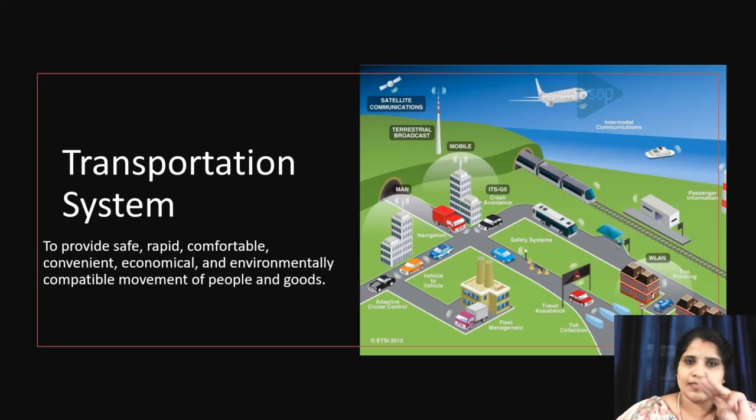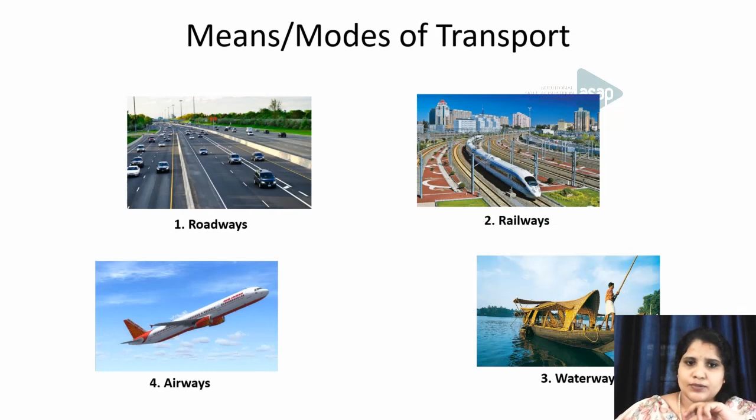Depending on the means or modes, transport can be classified into four: roadways, railways, airways, and waterways. Today we will be seeing roadways in detail. Focusing on road transportation, there are two elements: one is the traffic engineering part, and another is the pavement engineering part.

Under traffic engineering, you might have studied in your modules 1 and 2 the geometric design of highways and the various traffic factors influencing it, including design elements like vertical alignment, horizontal alignment, and sight distance consideration. Along with that, we'll have to study intersection design also, and today's class will concentrate on the intersection design part.

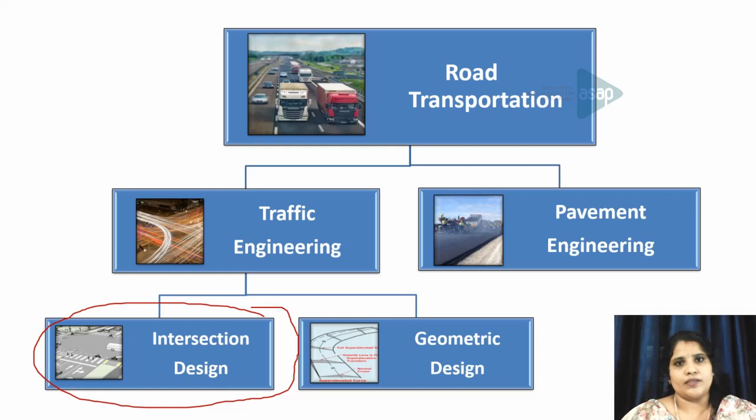In pavement engineering, we will see the different types of pavement and the different materials that can be used for construction of pavement, the standard test procedures used to ascertain the quality of materials, and also the different design methods, all covered under pavement engineering.

Let's consider a traffic corridor. Depending upon the traffic flow characteristics, the traffic corridor can essentially be split into a mid-block section, a transition zone, and an intersection. The flow characteristics are different for each of these zones. If we consider the mid-block section, almost all vehicles are in a free-moving condition, or sometimes in a car-following situation.

Whereas if it is nearing an intersection area, depending upon the control provided there, it may be showing a red signal or a green signal. Accordingly, it may take a decision whether to move or to stop. If it is stopping, it has to stop and wait in a queue.

So what happens in the transition zone? From mid-block to the intersection, there is some kind of transition happening. For example, a vehicle from the mid-block, if he wants to turn left, he may be shifting his position, or if he wants to turn right, he may be shifting his position to the right. And then he needs to decide on his speed, whether to reduce it or safely move with the same speed.

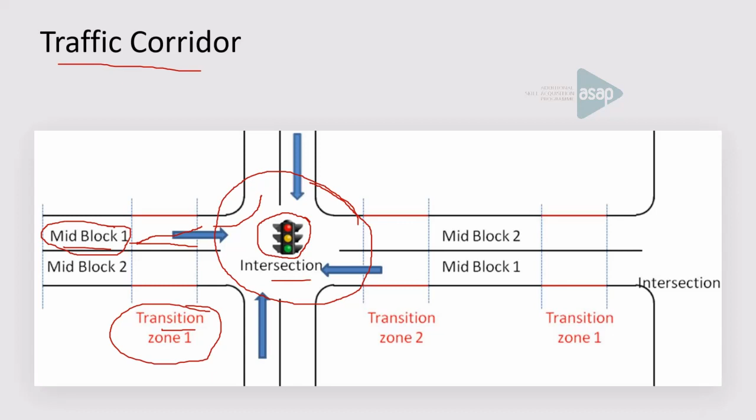So the transition zone is a zone of transition from mid-block to the intersection area. Let's see in detail the intersection, the different types of intersections, and the design parameters to be considered, and also we will see the signal design, the Webster method of signal design.

Intersections may be classified into two broad groups. One is at-grade intersection, where all the roads are meeting at the same level. Different examples are unchannelized intersection, channelized intersection, and rotary intersection. All are examples of at-grade intersection where the roads meet at the same level.

Whereas in the case of grade separated intersection, the roads will be meeting at two different levels. The intersecting roads are separated by a difference in level, thus eliminating the crossing maneuver.

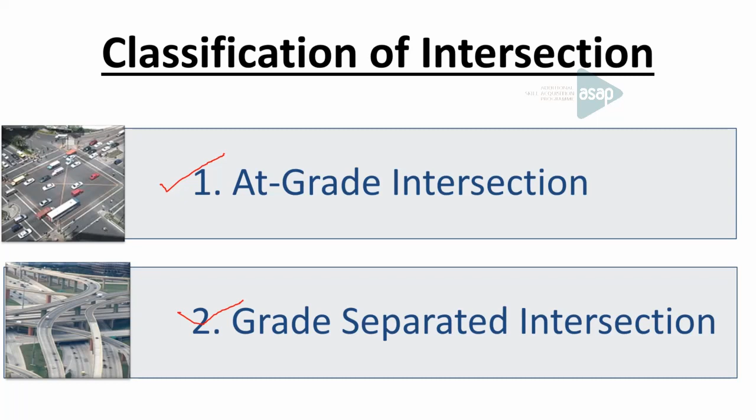The at-grade intersection can further be classified into a three approach intersection, where there are three roads or legs meeting at a point. It resembles the alphabet T, so it's called a T intersection, meeting at right angle. Whereas if one of the approaches meets at an angle other than right angle, it becomes a skewed T. It can also form a Y intersection depending upon how the three roads are meeting.

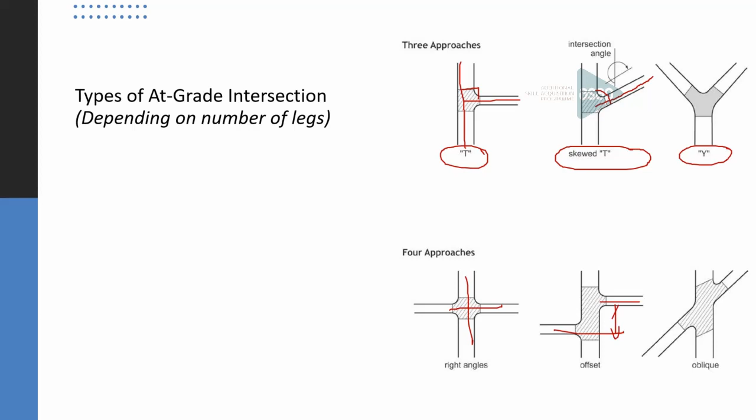Then there can be four approaches meeting at right angles, or meeting at an offset, or there can be an oblique intersection where all four roads meet at some angle other than right angle. Then there can be approaches with five or more legs, like a 5-leg approach or 6-leg approach, etc.

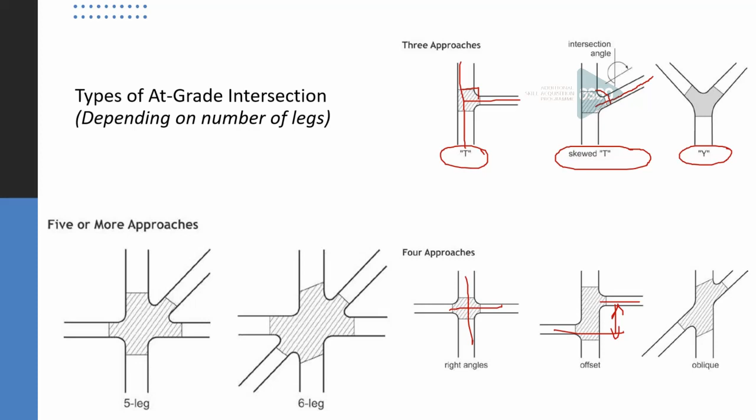Let's consider this example where a minor road meets a major road. The vehicle coming from the southern side of the major road has an option of moving straight, left, or right. Similarly, the vehicle coming from the opposite direction also has the freedom to move straight, right, or left. So what happens if all these movements happen simultaneously?

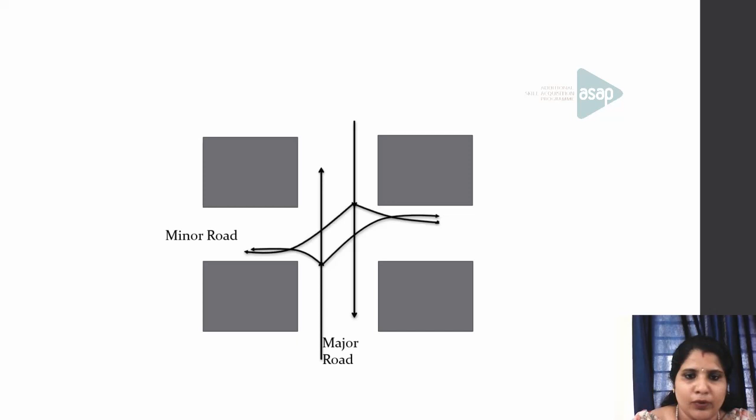This can lead to collision. So these are the points of collision. So how can we eliminate these points of collision?

Let's consider the example of two-way streets where vehicles are moving in both directions in these two streets. If this is the type of movement, how many conflict points can this lead to? Yeah, it can lead to a total of 32 conflict points.

Okay, how? Let's see the vehicle coming from here. It can either move left, straight, or right. If it is moving to the left, it is diverging from here and merging with the other road. So there is one diverging conflict and another merging conflict happening here.

Then if it is moving to the right, there can be another vehicle coming from the opposite direction also turning right. This will lead to an intersecting conflict. Then it can have a conflict with a vehicle coming from this direction, and also when moving here, the vehicle coming from the other direction may come and intersect with it.

So there are 32 potential conflict points, or potential accident locations, that can happen when two-way streets meet each other. So how can we reduce this accident probability?

Now let's see the different types of maneuvers at an intersection depending upon the traffic conflicts there. The first one is crossing. So when two vehicles are crossing each other, that will lead to a crossing or intersecting conflict.

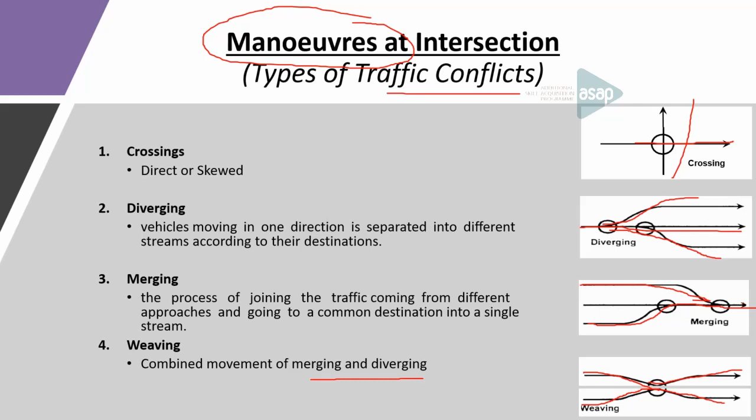Let's see the classification of at-grade intersections. First is the unchannelized intersection, seen in residential areas where two roads meet each other with no means of channelizing or control. The vehicles themselves decide where and how to move.

Another is the channelized intersection, where the vehicle stream is segregated depending upon the direction it wants to move. Another is the rotary intersection, where a central island is provided and vehicles can move around this rotary, diverging and merging from this intersection area accordingly.

The next one is a signalized intersection, where signal lights are provided according to the volume existing on each of these roads.

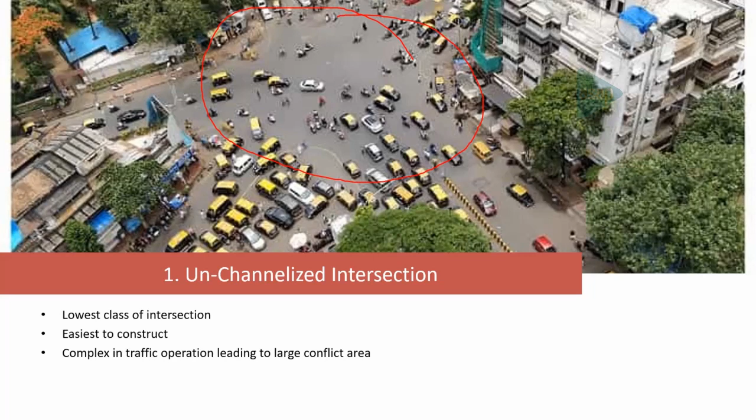Unchannelized intersection is the lowest class of intersection. It is easy to construct, but the traffic operation is very complex, leading to a large conflicting area, since there is no means of segregating the traffic depending on the direction it wants to move.

Next is the channelized intersection, where channels are provided, with traffic guidelines or pavement markings according to the direction the vehicle wants to move. Thereby we can control its movement, facilitating safe and orderly movement of both vehicles and pedestrians.

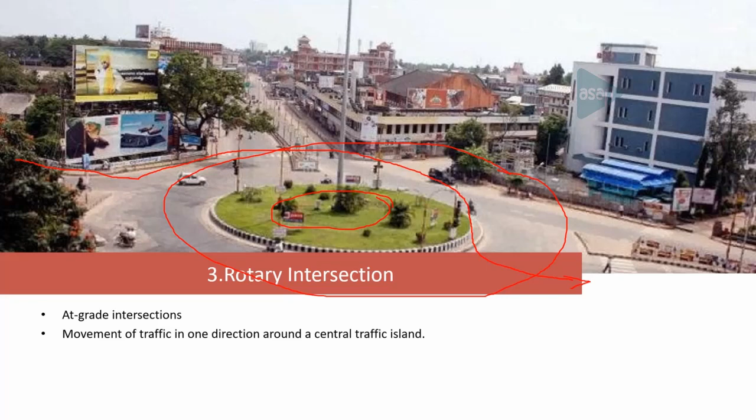A rotary intersection is an example of an at-grade intersection with a large intersection area and a central island. A vehicle entering the intersection can move around this island and diverge accordingly. This reduces potential conflict points and also reduces the waiting time for vehicles at each approach leg.

Let's compare a conventional intersection with a rotary intersection. We have seen that the number of conflict points in a conventional intersection is 32. What happens when a rotary is provided instead? The total number of conflict points is reduced to 8.

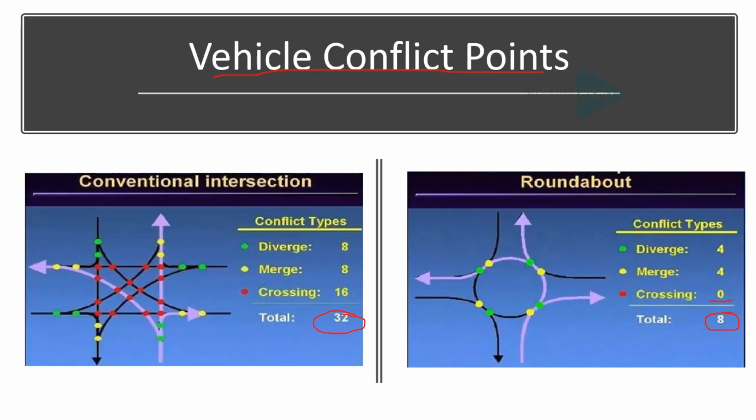As you can see, the crossing conflict has been completely eliminated. The advantage of providing a rotary is that crossing conflict is completely eliminated and converted into a weaving maneuver, which consists of both merging and diverging maneuvers. That is the advantage of providing a rotary roundabout.

The Transportation Research Lab, or TRL, has proposed an empirical formula to find the capacity or maximum volume in a rotary roundabout, which depends upon certain factors. Let's see what those factors are.

Consider a rotary roundabout: if a vehicle is coming from the west side and entering through this portion, there will already be existing traffic in the rotary area. The vehicle will first merge with that traffic, move along with it, and later diverge. This portion is known as the weaving section, where both merging and diverging maneuvers happen.

The capacity of this rotary roundabout depends upon the weaving section, specifically the width of the weaving section, and it also depends upon the length of the weaving section. Another factor is P, the proportion of weaving traffic to the total traffic.

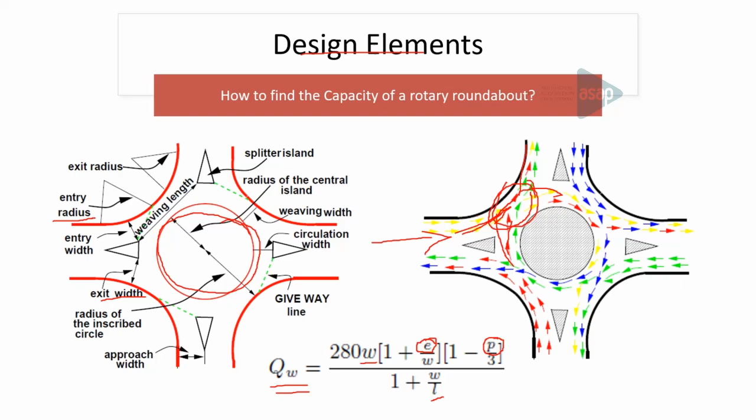So likewise, you can see the vehicles coming from different approaches and the desired direction in which each wants to move. What is being asked in the question is to find the capacity of this particular rotary roundabout. As I told you earlier, the capacity of a rotary roundabout is very much dependent on the weaving section, the length and width of the weaving section.

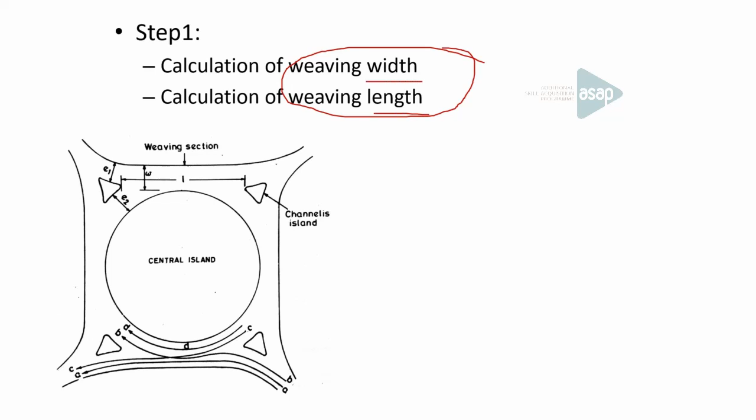So let's see how we can find this width and length. This is the weaving section under consideration. We need to find how much should be the width and length of this weaving section. The width of the weaving section is always kept one lane width more than the average entry and exit.

Let's consider this portion through which the vehicle enters the weaving section, through E1 and E2. So the average entry width is E1 plus E2 divided by 2, plus an extra 3.5 meters, or one lane width, being added.

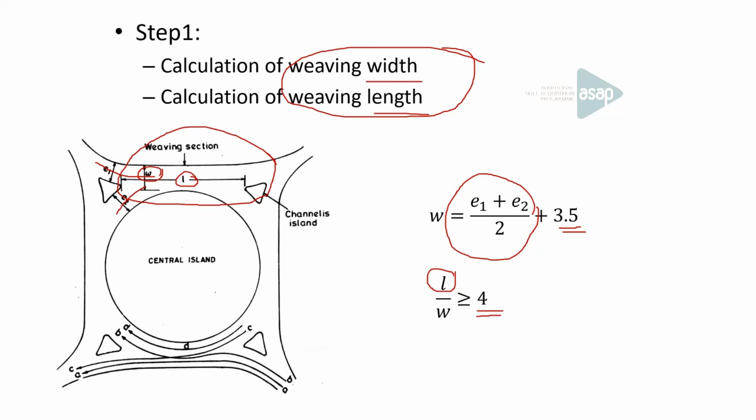Whereas the weaving length is always kept much higher than the weaving width. The ratio of length to width of a weaving section, the minimum value provided by IRC, is 4. So the weaving length is always 4 times the weaving width.

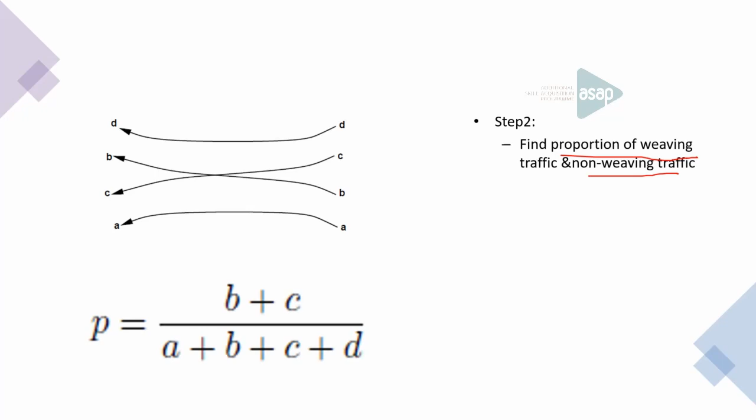Next, you have to find the proportion of weaving and non-weaving traffic. As I told you, D and A are the non-weaving traffic, moving through the outermost lane, whereas C and B are first merging and later diverging. So the proportion of weaving traffic will be B plus C, the weaving traffic, divided by the total traffic, A plus B plus C plus D.

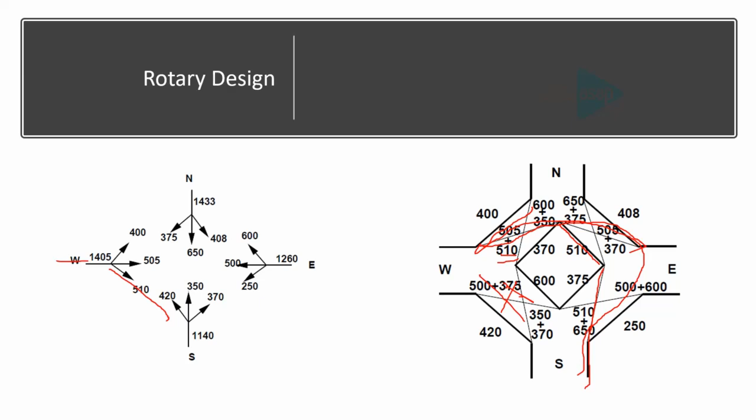So this direct movement is not permitted. It has to move around and go this way. So this 510, first it will get merged into the already existing stream. After that, it prefers to move to the right hand lane, and then it will diverge and move away from the intersection area. Similarly, you can mark the vehicles coming and leaving in different directions, and this will form this diagram.

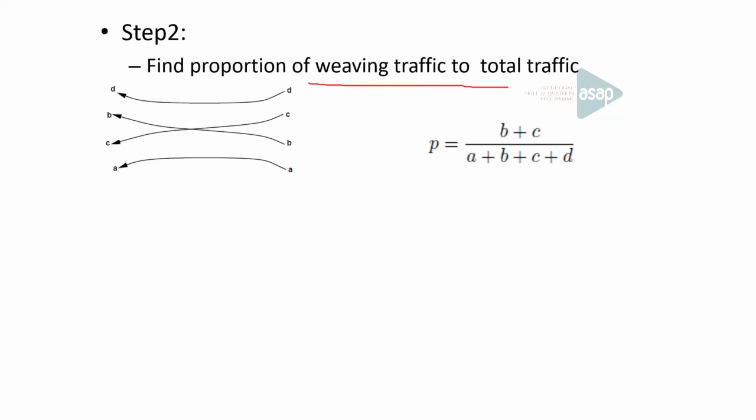After drawing this traffic negotiating the rotary island, next we can find the proportion of weaving traffic, which is the weaving traffic to the total traffic. Now you can use this diagram, which shows the traffic negotiating the rotary area, to find the proportion of weaving traffic in each of these directions.

So first let's consider the northwest direction. If I consider the northwest direction, how much is the weaving traffic here?

There is this merging one and this much is the diverging one, so the sum of this will give you the total weaving traffic. Whereas if you see this 400, it is moving through the leftmost lane. If you consider this 370, it is again moving through the rightmost lane. So these two are non-weaving traffic.

So how can I write the proportion of weaving traffic in the northwest direction? It is 505 plus 510 plus 600 plus 350, divided by, along with this you have to add the vehicles that are non-weaving, which is 400 and 370, which are moving through the left and rightmost lane. So the ratio is 0.718.

In a similar way, I can find the weaving traffic in the northeast direction, which is coming to be 0.674. Then again in the southeast direction we can find, which is 0.783, and the southwest direction, which is again 0.6099. Of which value should we select?

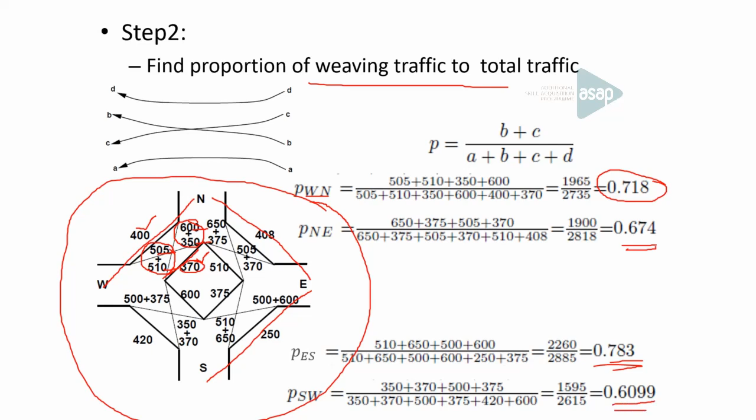We must select the max value. This value we have to select because the capacity of this rotary intersection depends upon the maximum capacity of this weaving section, or the maximum proportion of this weaving traffic.

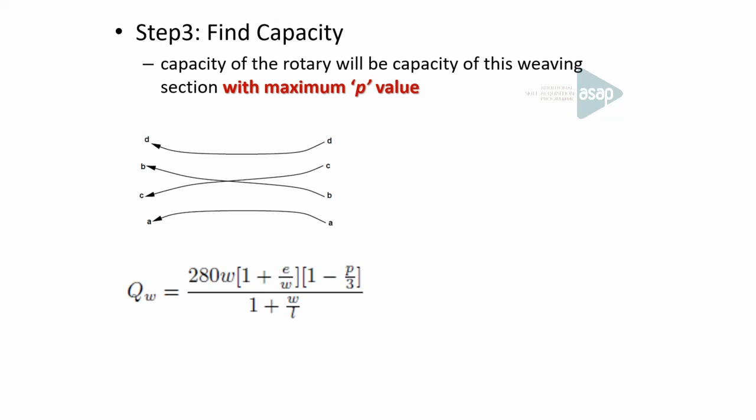So once we find that, the next step is, once we get the value of P, then we can find the capacity of the rotary intersection by the TRL formula, where we can substitute these values. We already found what is W, we found what is L, and we know what is E, and we have found what is the value of P, or the weaving traffic proportion.

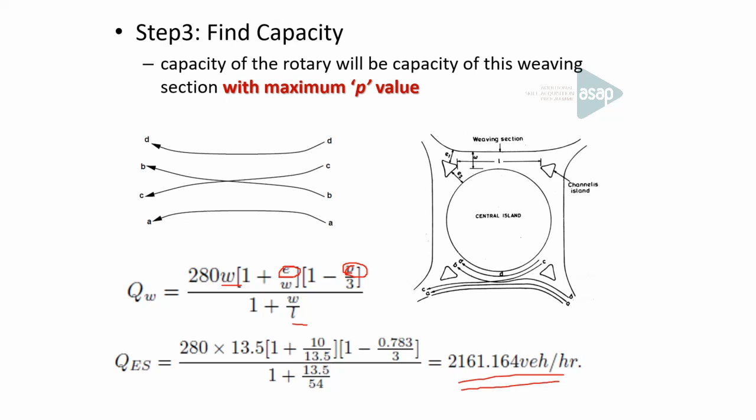So when substituting this, you will get the capacity of this rotary roundabout, which is coming to be 2161 vehicles per hour. Okay, hope this is clear to you.

Till now we were seeing the classification of at-grade intersection. We have seen unchannelized, channelized intersection. Then we have seen the rotary intersection, how to find the capacity of rotary intersection. So the rotary intersection is working based on the principle of space sharing. It is sharing the space among different traffic which are moving into different directions.

Next, let's see signalized intersection, which is working based on time sharing principle. So let's move into the details of that.

So let's consider here two major roads are moving. Both the vehicles are thinking that they have the right of way to enter. Then what happens? That will lead to an accident. On the other hand, it is being done by the signal. It is actually time sharing between them.

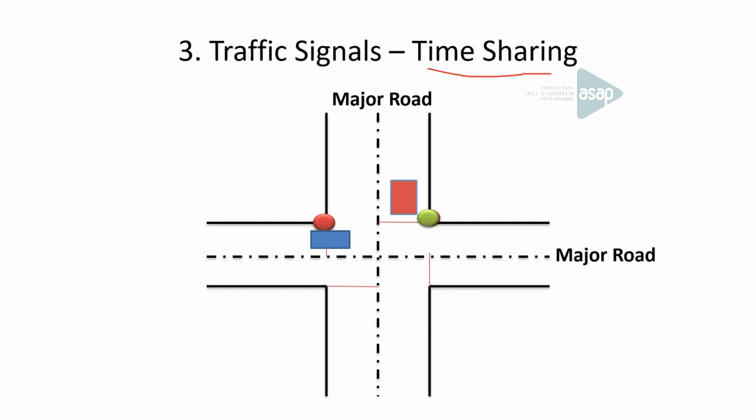So if the first vehicle, one road is shown red, the other one is shown green, so that the vehicle in the green road had the right of way to enter. Same time the other vehicle will be waiting, and next when the signal turns green, the vehicle which is waiting can enter the intersection area, the other can wait there. So traffic signal is a most effective and flexible method of controlling traffic, which is widely being used in several cities around the world.

So the conflicts arising from different movements is addressed by the time sharing principle. So how is the right of way allotted here? The right of way is allotted to different traffic according to the standard color. So we all know the standard color of traffic light, where there is red, amber, green. Red indicates stop, amber is to slow down, and green means you are free to proceed.

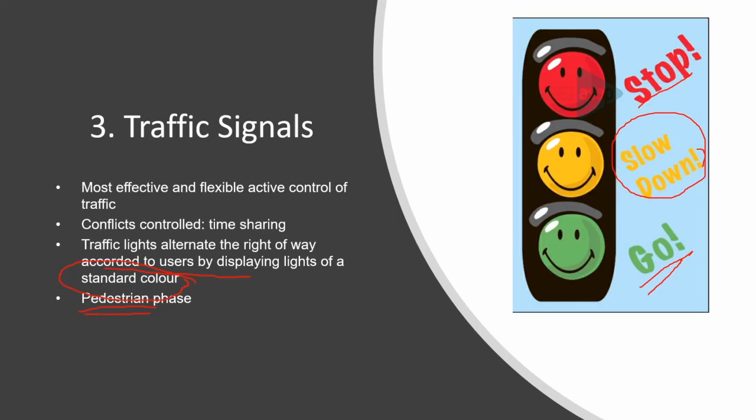And at some cases where the pedestrian traffic is high, there is one more phase being provided for the pedestrians, exclusively for pedestrians, which is known as pedestrian phase. Let's move on to the basic definitions and notations.

So mostly in the case of signal, when we are designing the signal system, we are concerned about the straight through and the right turning movement, whereas the left turning is considered as a free left, because in Indian condition it is a left hand drive, where the vehicles are keeping to the left hand side of the road. It's called left hand drive condition, where the left turning movement is almost free, unless otherwise there are considerable amounts of pedestrian traffic crossing here; this left turning movement is considered as free left.

Okay, so if I'm permitting all these movements to happen simultaneously, what happens? This may lead to a certain number of conflicts. I told you it may lead to 32 conflict points. So in order to eradicate that, I have to share the time among these different movements.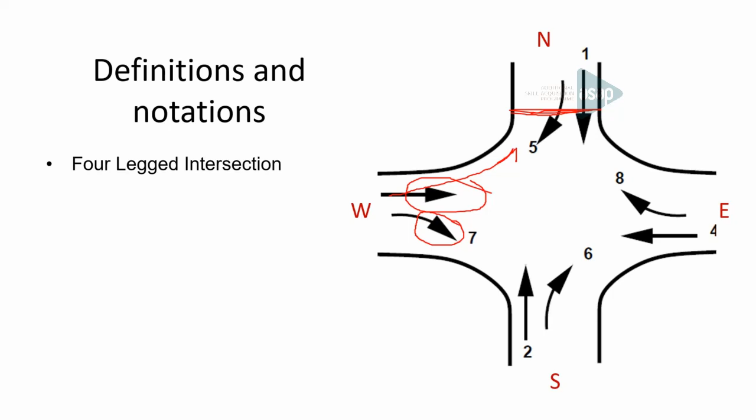One way of doing that is by providing phase. So the east-west I can put under one phase. Phase is nothing but a time during which non-conflicting movements are assigned, allowing a set of movements to flow safely. So it's a phasing - we provide only non-conflicting movements.

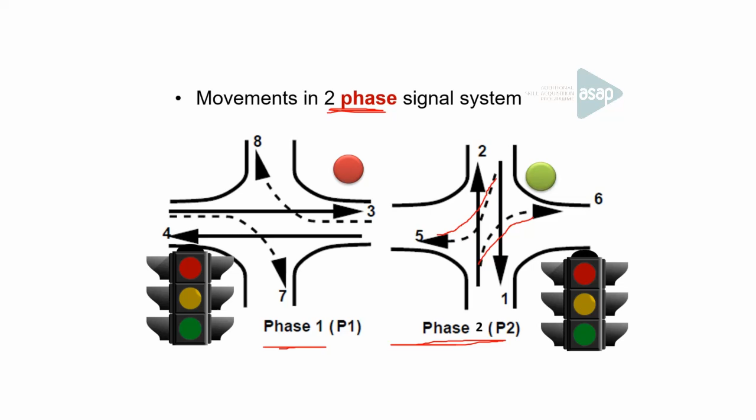So let's see this signal phasing. When green is shown to one phase, the other movement will be shown red. Whereas when the indication turns into red for one phase, the other will be green. So that is how we can share the time among these two conflicting movements. That is the simplest way of providing phasing.

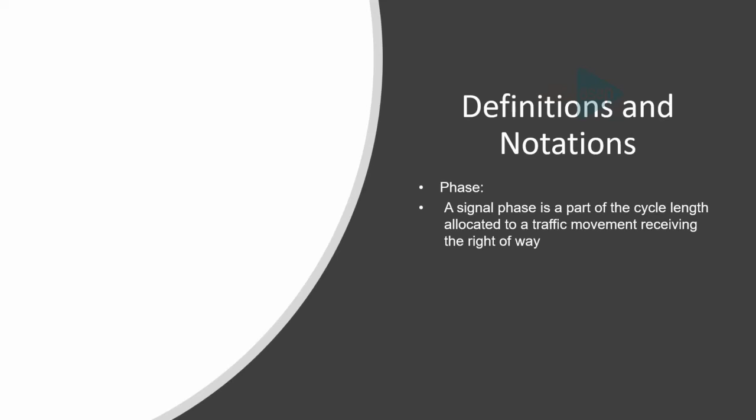So let's go into the definition and notation. A signal phase is a part of a cycle length allocated to a traffic movement receiving the right of way. During the green interval, non-conflicting movements are assigned into each phase. I'm assigning the green interval for the east-west phase, and the other north-south phase will be provided with a red interval.

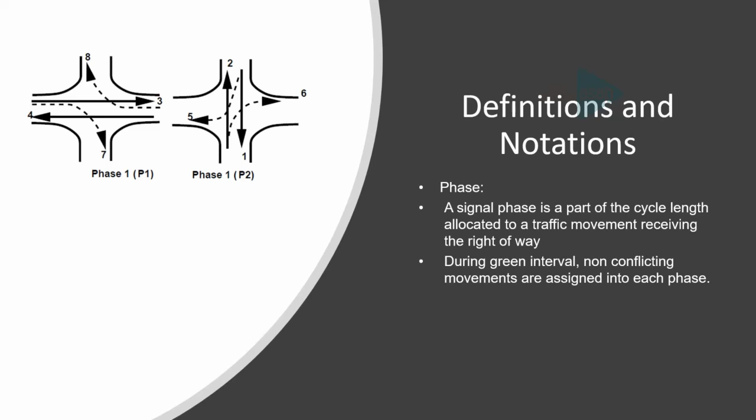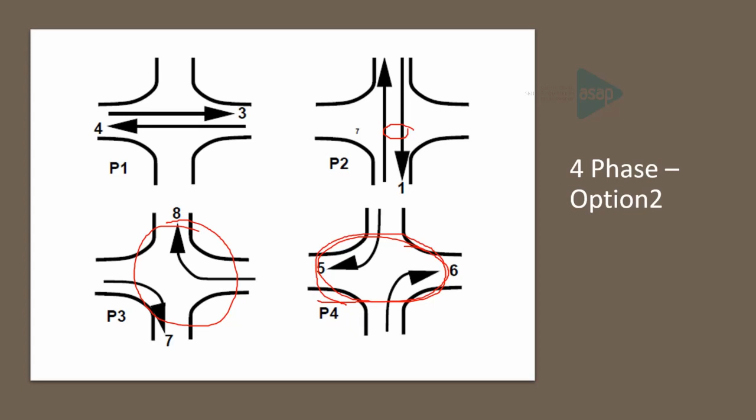So another option is, if the traffic is very high, then I can permit from each approach separately. From westbound, I can provide one phase, from eastbound another phase, north into a third phase, and vehicles from the south into a fourth phase. Then if the proportion of right turning movement is high, I can make east-west direction one phase, north-south another phase, and then club the corresponding right turning movement in the east-west into a third phase, and the right turning movement in north-south into a fourth phase. This is usually provided when the right turning movement is heavy.

So let's consider this two-phase signal system, phase A and phase B. Right of way is provided to east-west direction for phase A and north-south direction for phase B. So what happens? How can we share the time here? Let's consider phase A.

First we will be providing green, after that a warning sign or amber, then it moves into red. So what about phase B? The vehicles are moving in phase A during the time green and yellow, so the corresponding time for phase B should be red. Otherwise there will be conflicts.

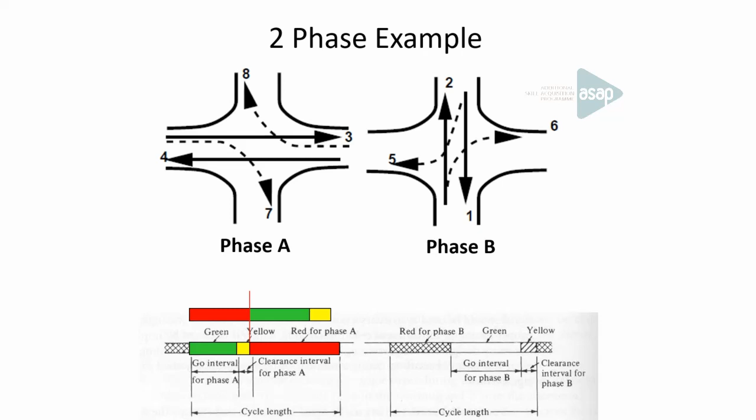So this time is red, and after that when the red time is provided for phase A, the same time can be utilized for phase B for moving the vehicle. So as I told you, the green and amber time for phase A will be red for phase B, whereas the red phase for phase A can be utilized for the vehicle movement on phase B. So this is how the phasing diagram is being designed.

At the end of each signal cycle, there will be an all-red period provided. This all-red time has got two purposes to serve. One is, if the pedestrian traffic in that locality is high, then this all-red time can be utilized for them to cross the road. Another purpose is, if some vehicle got trapped in the intersection area, then during this all-red time, they can clear the intersection. So during all-red time, both the phases will be showing a red indication.

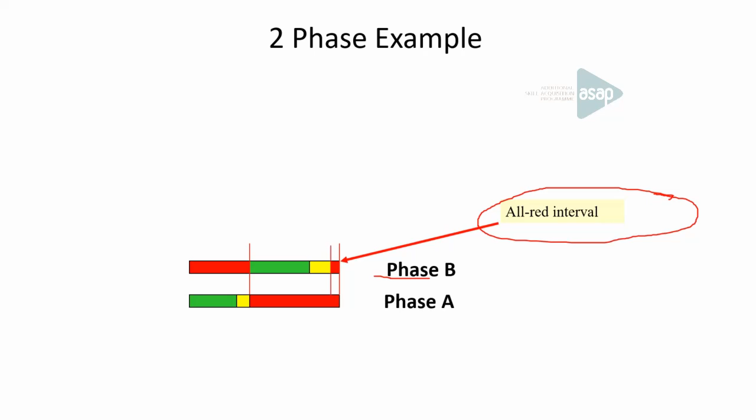So next, the total time for this is what is known as the cycle length. It is the time taken to complete one full cycle of indication. It indicates the time interval between the starting of one green for one approach till the next time the green starts in the same approach. So after this red, again the green will be showing on phase A.

So the cycle is the time interval between the starting of green for one approach till the next time the green starts in the same approach. The time required for this is known as the cycle length, consisting of green, amber, red, green, amber, red period. So the cycle is one complete sequence of all these indications.

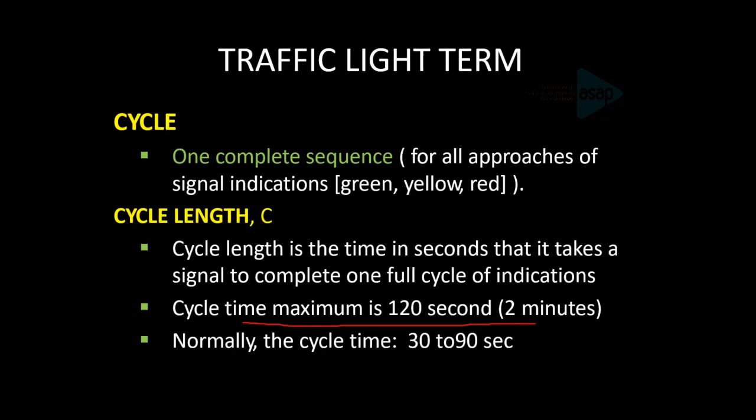The maximum cycle length that can be provided is 120 seconds. So when designing, if the cycle time you are calculating exceeds 120 seconds or 2 minutes, you have to limit it to that. Normally the cycle time varies in the range of 30 to 90 seconds.

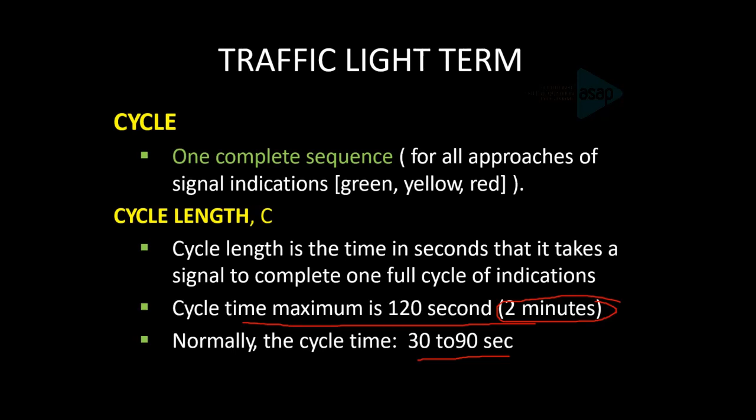Interval is the different indication that is being shown. Green interval means a green indication is shown for a set of non-conflicting movements. At the same time, the other approach will show a red interval where movement is restricted, and there is a yellow time, which is a change interval from green to red time. So these are the different intervals.

Now let's see the loss time. Suppose you are waiting in a queue for the signal light to turn green, and you are in the fifth position. Then suddenly it turns green. Can all of a sudden you enter into the intersection area?

No, you have to wait for some time. The first vehicle has to react to the situation and move, then the second vehicle needs to cross the stop line, then the third, fourth, and only then will you get a chance to enter the intersection area. So there will be some amount of loss, and this loss can be called the initial loss.

And finally, there is a clearance loss also. For example, there are two drivers approaching the intersection area, and suddenly the signal light turns from green to red, so the amber or yellow light is shown. The conservative driver may wait there, whereas the rash driver will utilize this opportunity and cross or move through the intersection. So depending upon driver characteristics, there will be some confusion at the end of each signal time, or at the end of yellow time there will be a clearance loss.

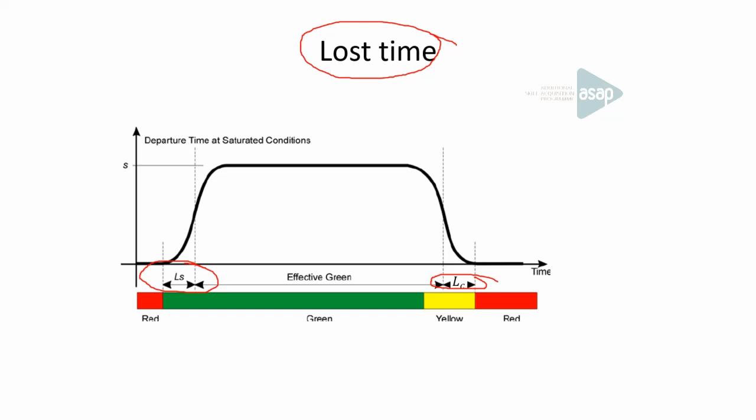So the loss time indicates the time during which the intersection is not effectively being used. If I consider the total time utilized by a particular phase as green plus yellow time, of which there will be some amount of startup loss time Ls, and some amount of clearance loss time Lc, then the total loss time will be the startup loss plus the clearance loss.

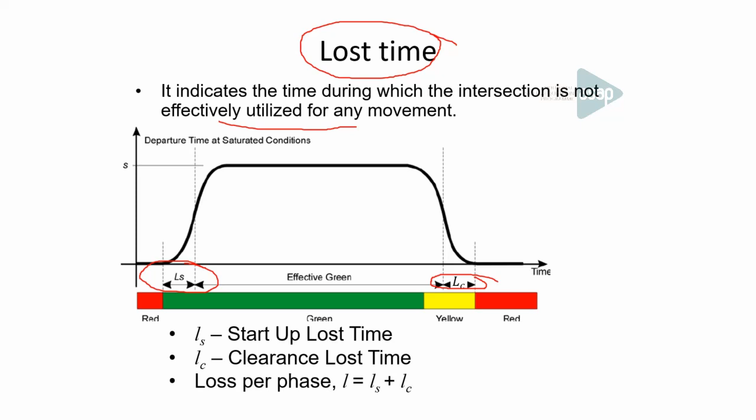So let's see what is startup loss time. The indication is red first, so the vehicles will be waiting. Then it turns green at time t0. The first vehicle is crossing at time t1, second vehicle at t2, t3, t4, t5, with the corresponding time the vehicles are crossing the stop line.

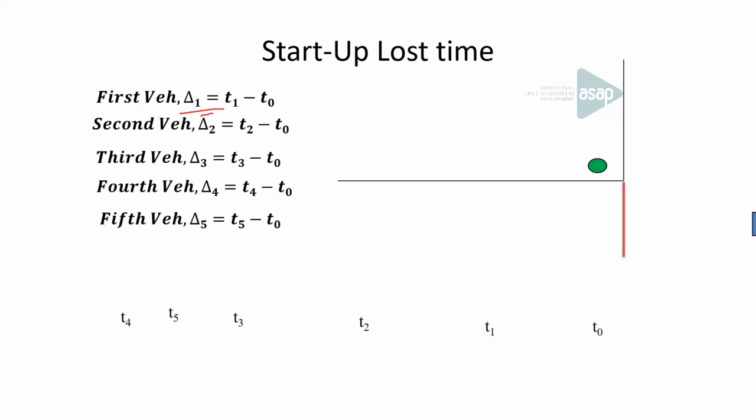So what will be the headway? It will be t2 minus t1. The loss for the first vehicle from the time it turns green is t1 minus t0. Similarly, for the second vehicle it is t2 minus t0, and correspondingly for the fifth vehicle the loss time will be t5 minus t0. If I sum up all these values, I'll get the startup loss time.

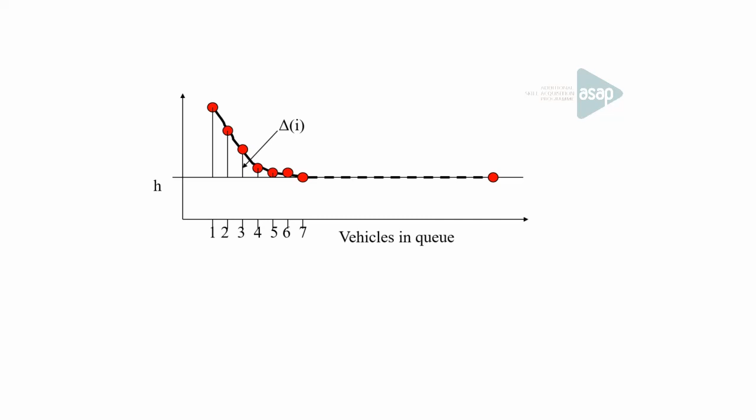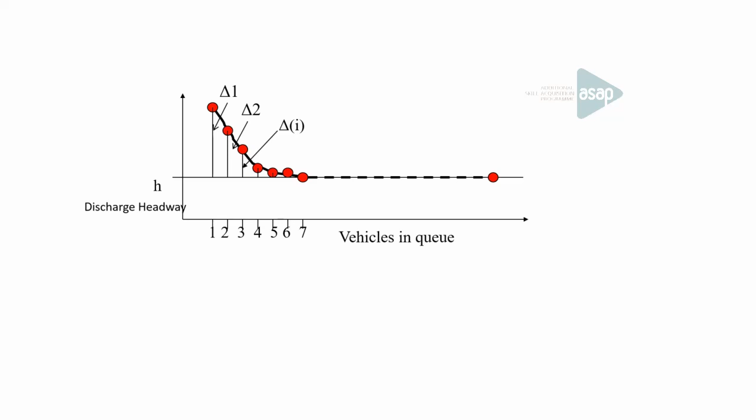So if we plot the loss time against the vehicle position in the queue, initially we can see that the loss time will be high, and as we move on to the fifth or sixth vehicle, it becomes almost constant. This is what is known as the discharge headway.

This discharge headway can be used for finding the saturation flow rate. For example, if the discharge headway between two vehicles is 1 second, what will be the saturation flow rate? It will be 3600 divided by 1, or we can say 3600 vehicles will be moving through that intersection approach.

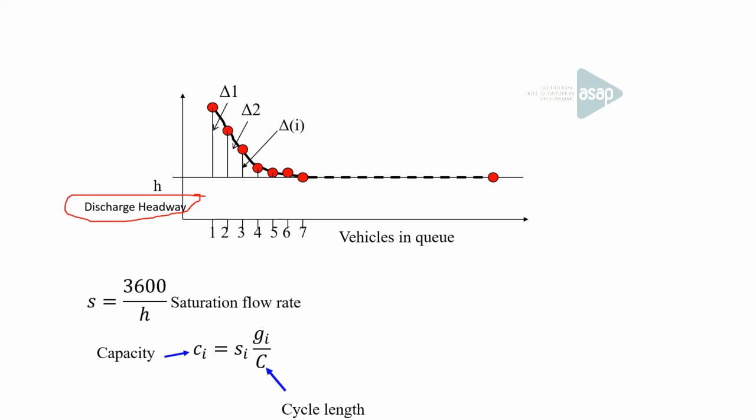Under the ideal condition, if the entire 1 hour is provided for green, the number of vehicles that can cross the intersection area is known as the saturation flow rate. So if we know the saturation flow rate, we can find the capacity. The capacity of the intersection depends upon the saturation flow rate, the cycle length, and the effective green time being provided.

Now let's see what is effective green time. Green, yellow and red are the different intervals in a cycle. Green and yellow is the time during which vehicle movements are permitted. When green starts, there will be a startup loss time given by L1, and when it finally turns red, there will be a clearance loss time.

So how much effective time is available for the vehicle to move is what is given as the green time. The total time available for movement is G plus Y, which we assume the vehicle can travel, but that's not the actual value—there will be some loss happening. So it is G plus Y minus this loss, which gives the effective green time used to find the capacity of the intersection.

Next, let's see what is loss time per phase. For this particular phase, how much will be the loss? It will be L1 plus L2. You may wonder why the red time is also a loss—it's not a loss for this particular phase since it's red, but for the other phase it will show a green indication where vehicles can move. So the loss time is the time during which vehicles are restricted from entering the intersection area—the initial loss plus clearance loss is the loss for one phase.

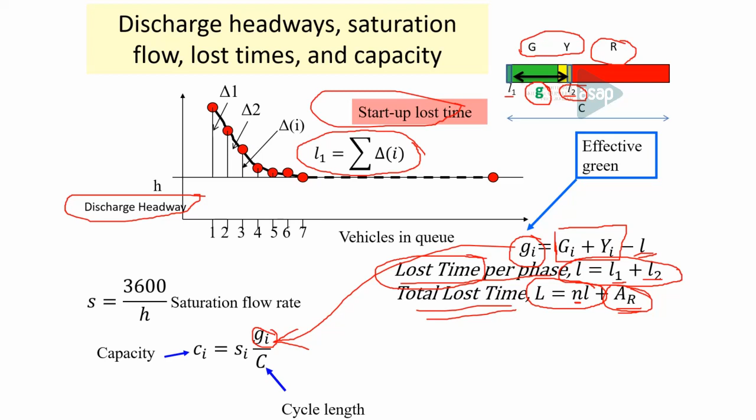If there are two phases, it will be 2 times this loss per phase for the total loss. If an all-red time is also provided, for example for pedestrians crossing, we provide an all-red time where vehicle movement is not possible. So the total loss time for vehicle movement is the loss time per phase multiplied by the number of phases, plus the all-red time. This is how we find the total loss time.

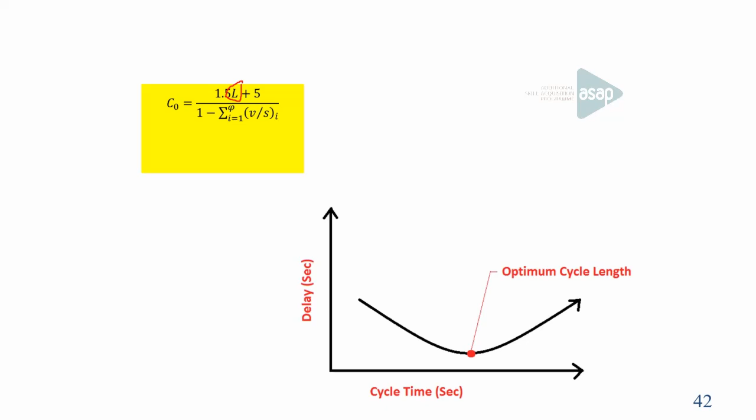This total loss time is used by Webster to derive the equation for Webster's optimal cycle length. Webster's optimal cycle length is derived from this loss time, and another value considered is the V by S ratio.

For example, the total volume in an intersection area is say 1000 vehicles per hour, of which one direction has 750 vehicles and the other has 250 vehicles. So in what way should we allot the time? For example, I have 1 hour of time—how will I allot it? 750 and 250 is the proportion of volume in these two directions, so 75% of the time I will allot to one movement and 25% for the other, depending upon the volume.

So V by S ratio: V is the volume and S is the saturation flow rate, under ideal conditions. If the entire 1 hour is provided for green, the maximum number of vehicles that can cross the intersection is given as the saturation flow.

You don't have to go through the derivation of this equation—you just have to know this is Webster's equation for finding the cycle length. If the cycle length goes too low, the delay will increase, and if the cycle length is too high, the delay will also increase again. So you have to have an optimum value of cycle length for which the delay will be minimum.

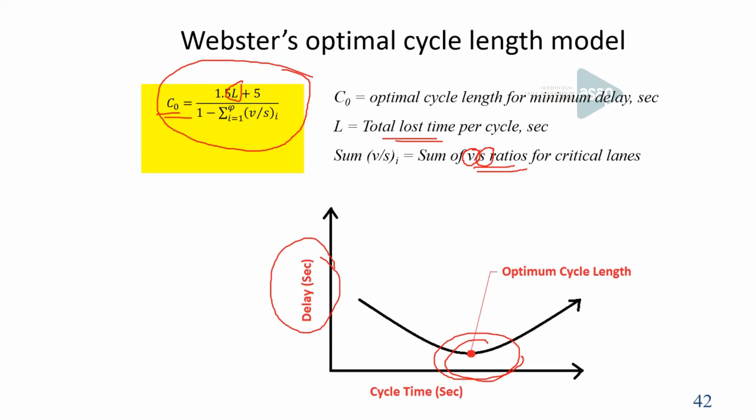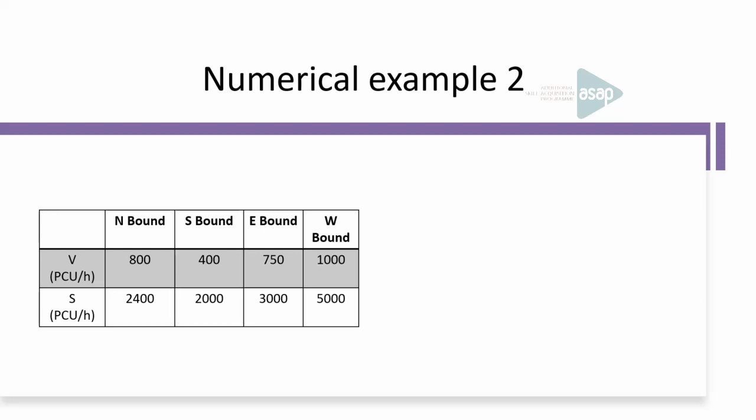Now let's do a numerical example and I'll explain the various steps involved. Here, the volume toward different directions is given—northbound, southbound, eastbound and westbound traffic—along with the corresponding flow rate. It's a fixed time two-phase signal, so the question itself provides how many phases it requires.

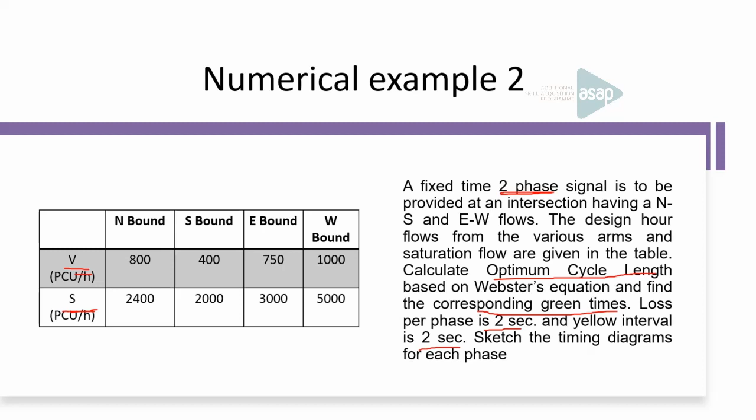It is a two-phase signal to be provided at an intersection having north-south and east-west flows. The design flows from the various arms and saturation flow are given in the table. Calculate the optimum cycle length based on Webster's equation and find the corresponding green times. Loss per phase is provided as 2 seconds and amber interval is also given as 2 seconds. Sketch the timing diagram for each phase.

So let's start solving this problem. First step is to determine the number of phases. In the question itself it is given as 2 phase, so directly we can say it is a 2-phase system. First phase is north-south direction and another phase we are providing for east-west direction.

Then what is the second step? The volume and saturation flow is given. We have to find the critical lane depending upon the V by S ratio. From the table it is given, we can find what is the V by S value. So north-south is clubbed together and east-west direction movements are clubbed together. That is our two different phases, north-south and east-west. So considering the north-south direction, which one is the critical one?

There is 0.33 and 0.20. So for which V by S ratio should we design it? For the maximum value, 0.33, we should design. And when we consider east and westbound traffic of these two, again we have to consider the maximum, which is 0.25. So what will be our critical V by S ratio? It is 0.33 plus 0.25, which is 0.58. Since we are clubbing north-south together, of these two we have to select the maximum value. And again from east-west direction we have to select the maximum value, which is 0.25, and the sum of this will give the critical V by S.

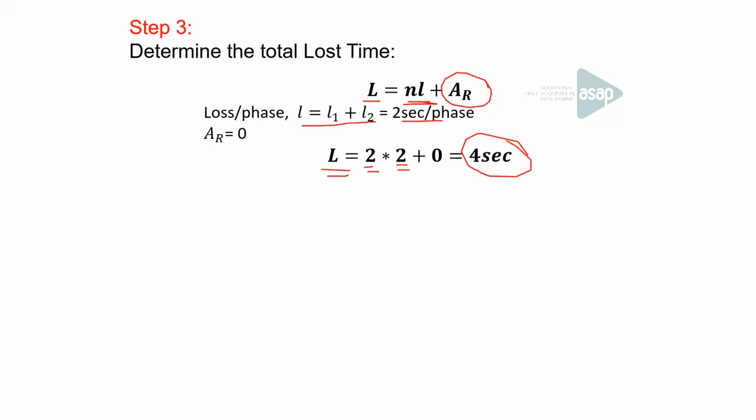So then we have to find the optimum cycle length as per Webster's equation. The cycle length depends upon two values: one is critical V by S ratio and another is the total loss time. These two values we have determined in step 2 and step 3, so we can directly substitute here. Finally you are getting the cycle length to be 26.19 seconds.

Usually the normal practice is to provide the cycle length in multiples of 5, so I can round it off to 30 seconds. So cycle length is 30 seconds.

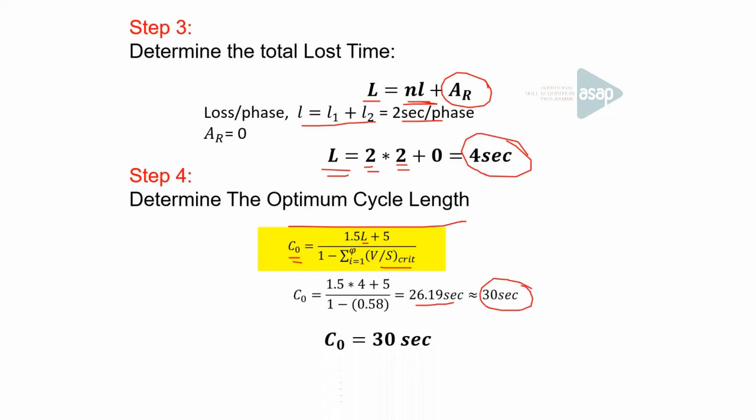The total cycle length is 30 seconds, of which the next step is green splitting. I need to split the entire cycle length between the two phases. What will be the effective green time? Effective green time will be the cycle length minus the loss time. Of these 30 seconds, 4 seconds is the loss happening due to startup and clearance loss. So the effective green time that can be utilized for vehicle movement is 26 seconds, which we need to split among the two different phases.

So we have two phases, the north-south phase and the east-west phase. If I'm splitting it, the corresponding green time for a phase will be the V by S ratio for that particular approach divided by the critical V by S ratio, multiplied by the effective green time. So in this case, if we consider the green interval to be provided for the north-south direction, it will be the V by S value for north-south direction, the maximum value 0.33, divided by the sum of critical V by S values, multiplied by the effective green time.

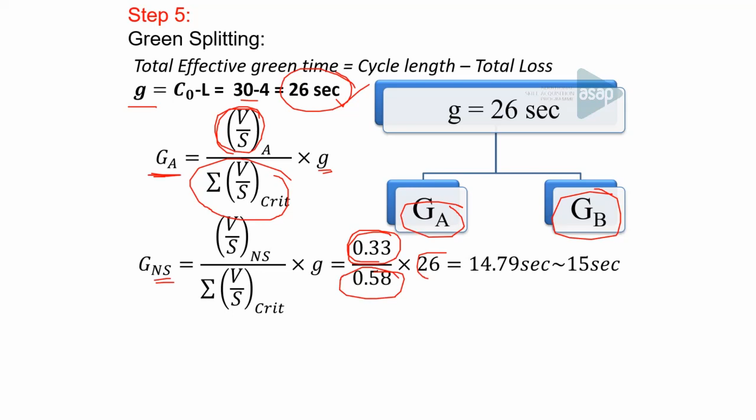This is the effective green time which we are splitting among these two phases, which depends upon the volume existing there, or the V by S ratio existing there. Now we are getting 14.79, which we can round off to the nearest whole number, 15 seconds. Similarly, the green interval in the east-west direction we are getting as 11.21, rounded off to 11 seconds. So you must take care that 15 seconds plus 11 seconds should equal the effective green time of 26 seconds. Accordingly, you have to round it off to the nearest whole numbers.

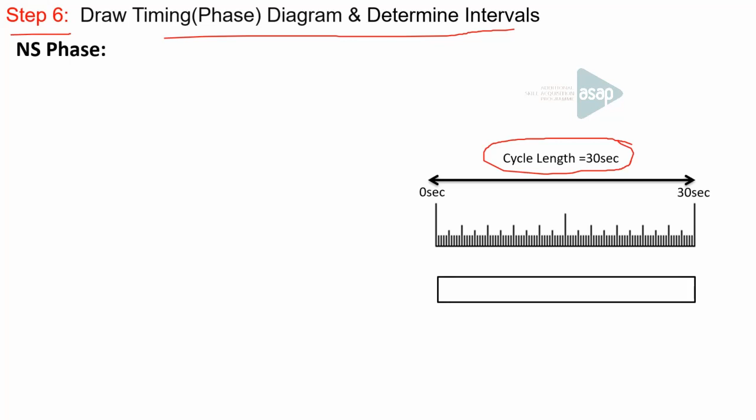Green split, the sixth step is to draw the phasing diagram, or to distribute the different intervals. If I consider a graduated scale, the total length of the scale will be the cycle length, 30 seconds, starting from 0 to 30. How can I split this among the two phases? We have two phases, one is north-south. So first let's draw a rectangle for the north-south phase, a timing diagram. We found the green time for north-south phase is 15 seconds, which you can mark here.

After that, the amber period is given in the question as 2 seconds. So after green comes amber, and the remaining time will be red. What will be the red for the north-south phase? It will be the total cycle length 30 minus 15 minus 2, which is 13 seconds. Then what will be the corresponding value for the east-west phase? So I can start from 0, 15, 17, and finally it is 30 seconds.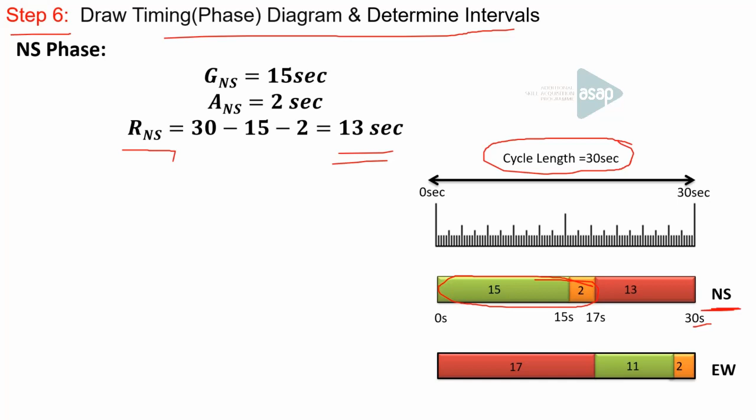Let's now consider the east-west phase. The 15 plus 2, which is the green plus amber interval for the north-south phase, is the time permitted for movement in the north-south phase, and it becomes the red interval for the east-west phase. So that is 17 seconds. Then the green interval we found to be 11 seconds, and after that we can provide an amber value of 2 seconds. So this is how we can draw the phasing diagram.

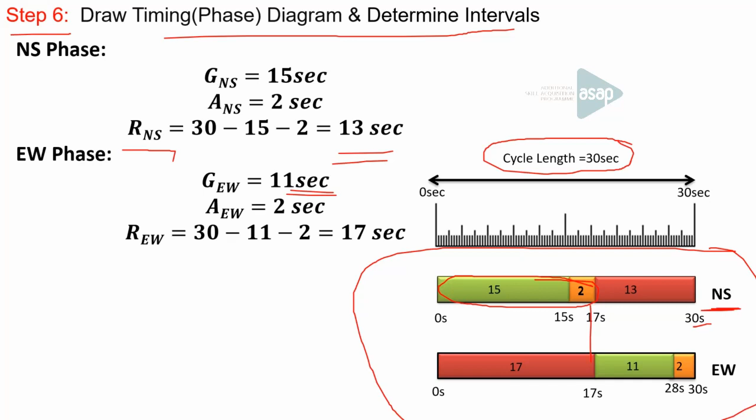So finally you have to complete the problem by drawing the phasing diagram, indicating the different intervals allotted for different directions of movement. There are 6 steps involved. First, find the number of phases. Then find the V by S value, the V by S critical value. After that, find the total loss time, and using these values we can find the cycle time or cycle length. That cycle length can be split among the two phases, and accordingly we provide the green interval. Once we get the green interval, from those values we can sketch the phasing diagram by providing the green, yellow and red intervals. So this is one way, or the simplest way of doing it.

Let's see what are the different types of phasing diagrams. The one we have drawn now is for the American practice, where after green, yellow is provided, then comes red, and after red again the green starts. That is the American practice of phasing diagram. Then there is the UK practice, where after green and also after red there is an amber period — amber after green and amber after red, which is known as red amber. Now let's move on to Indian practice.

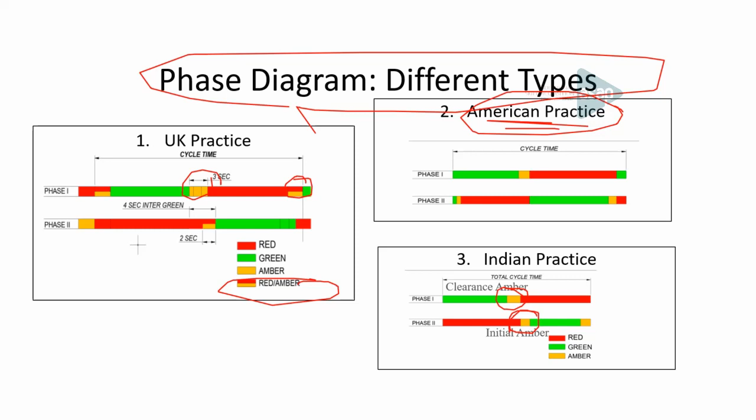Now let's define what is this intergreen period. In the earlier case, for the American practice of providing signal phase, I told you after the green interval for one phase there is amber provided, and directly the next green starts from here. But in some practice, usually in India, we provide this intergreen time between the two phases. The intergreen time is defined as the time between the end of right of way for a phase and the start of right of way for the next phase.

So let's see how this can be done. Once this green ends, there will be amber time, and as per American practice, directly the green starts from here, right? But whereas if intergreen time is provided, then in that case, this green is provided after an interval which is known as the intergreen time.

So this is the time difference between the end of one green to the start of next green in the two successive phases, which is what is known as the intergreen time. It is a period of time between the end of a green light phase in the driving direction and the beginning of green light phase in the crossing direction.

So the total loss time is given by this equation, where I is the intergreen time and A is the amber period. So what will be the time where the vehicles... loss time I can say is a time where no movement of vehicle is possible.

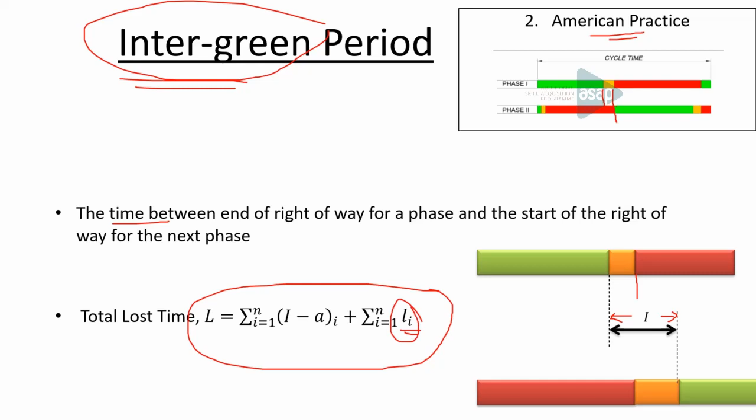So let's solve this problem where the design traffic flow in different directions are given and the saturation flow is also provided. It's a fixed time two phase signal, so the number of phases is given. The direction also is given: north, south and east, west roads meeting at right angle to each other. The design traffic flow and the saturation flow is given in the table. Assuming only straight ahead traffic, calculate the optimum cycle length and find the green interval for each of these phases.

The intergreen time is given as 4 seconds. The loss time per phase is given as 2 seconds, and the amber interval or yellow interval is given as 2 seconds. So let's solve this problem.

So the first thing is to determine the number of phases. So it is two phases, which is north-south and east-west.

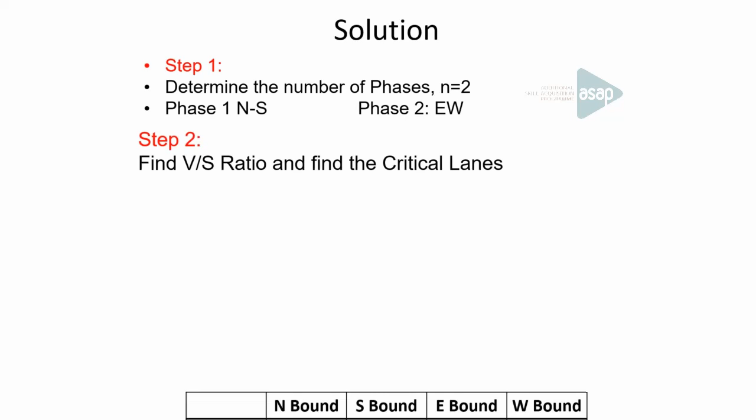Then the second step is to find the V by S ratio and find the critical lanes. As per the values given, we can find north-south is clubbed together, east-west is again clubbed together. Of this we can find the V by S ratio, and the maximum of this will be the north-south direction, which is 0.33. And the maximum in the east-west direction is again 0.33. So what will be our sum of V by S critical? It will be 0.33 plus 0.33, which is 0.66 as the V by S critical ratio.

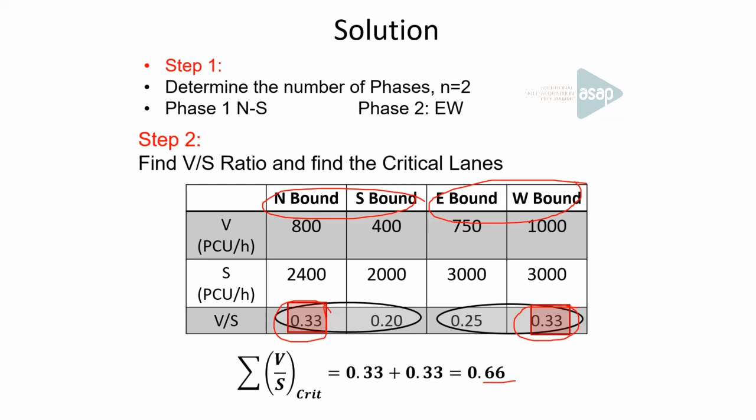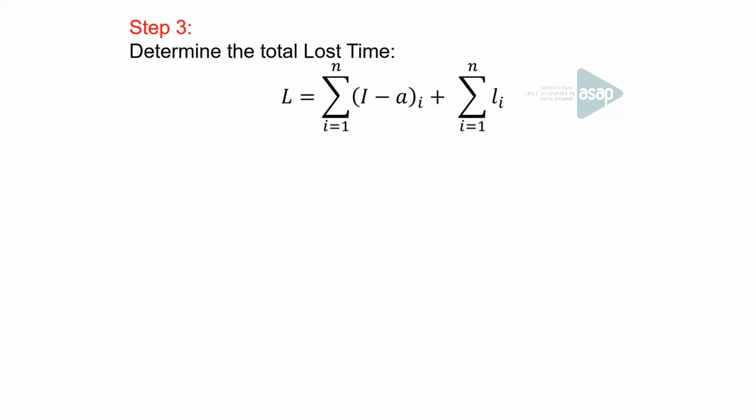And what is the next step? To determine the loss time. Since intergreen time is provided, this is the equation for finding the loss time. So loss per phase is given as 2 seconds. So this is what is loss per phase. And again, there is no all-red period - otherwise you have to add an all-red period also here.

So what we can provide is I minus A. So there are two phases, right? So you have to sum it twice. So this is 4 minus 2 into 2, plus 2 into 2. So total loss is 8 seconds.

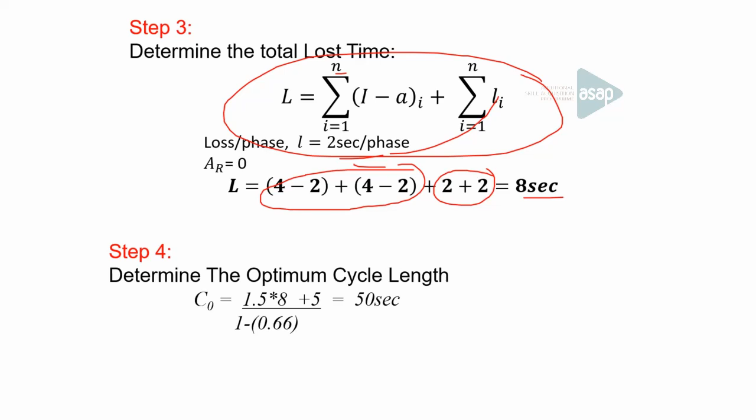The next step is to find the optimum cycle length. If the loss time is 8 seconds, and V by S critical is 0.66, then the cycle length comes out to be 50 seconds. Once the cycle length exceeds 120 seconds or 2 minutes, then you have to limit that to 2 minutes or 120 seconds.

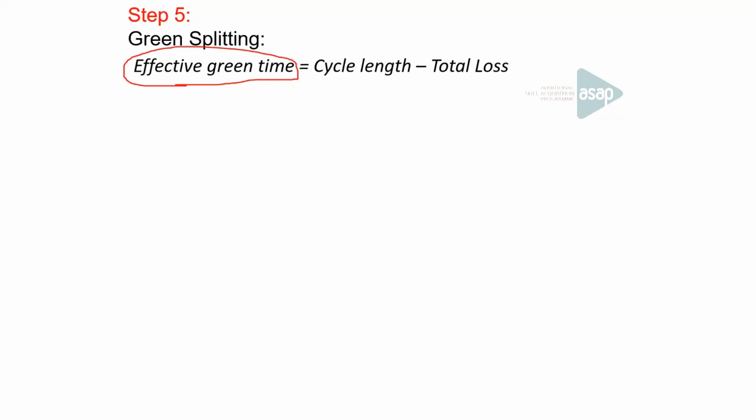Then what is the next step? The fifth step is green splitting. So for the entire cycle time, we have to see how much time is the effective green time, or the time available for the vehicle movement, which will be the cycle length minus the lost time. So 42 seconds is effectively available for the vehicle movement, which we can split among the two phases. There are only two phases here; otherwise, if one more phase is there, then we have to split among that phase also.

Another phase is there, GC. Since here there are only two phases, we can calculate or split it among these two phases. In the green splitting, we are splitting the green time according to the V by S value. So in the north-south direction, the V by S value, maximum value is 0.33.

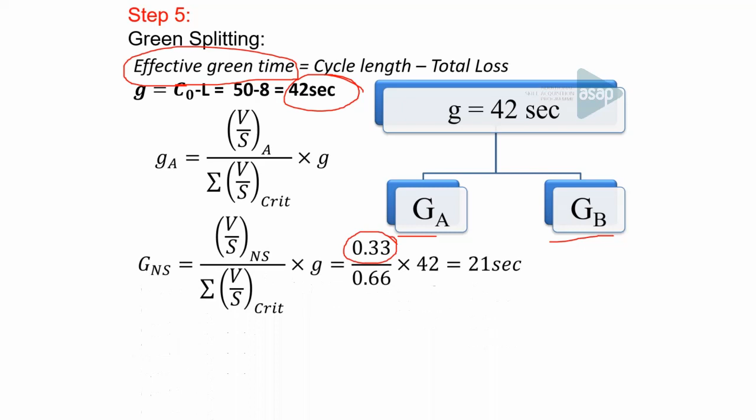So the time allotted for that will be 21 seconds. Let's now draw the phasing diagram for the signal intervals that we have determined.

As I told you earlier, we assume a graduated scale having a length equal to that of the cycle length. So we have to draw a rectangular box of length 50 seconds, as I have drawn here, and in that we have to mark the different time intervals.

We have already found that the green time for the north-south direction is 21 seconds. So let's start from the 0th second. We can allot 21 units for the green interval for the north-south direction, which is 21 seconds.

After that comes the amber time of 2 seconds. So from 21, we mark 2 seconds and the time becomes 23 seconds. So what will be the remaining time here? 50 minus 23 will be 27.

Since we have provided this intergreen time, or the Indian system of providing the signal phase, we have to provide 2 seconds after the red also. So if that is the system we are following, then after red we provide 2 seconds. So of the remaining 27 seconds, 2 seconds is again provided for amber, and the remaining 25 seconds will be the red interval available in the north-south direction.

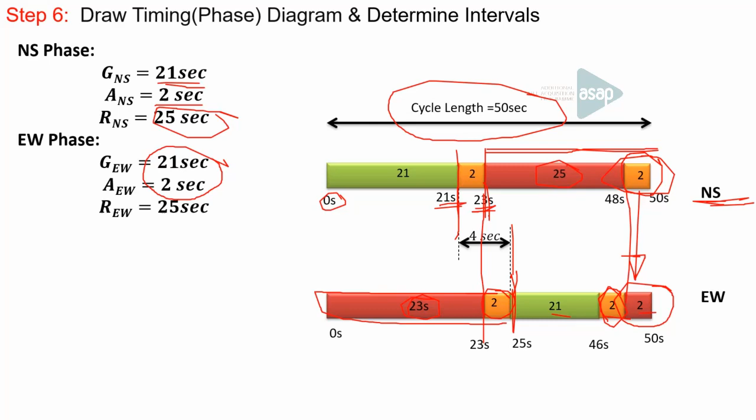So if I draw a straight line from here to here, 21 plus 2 seconds is the time permitted for vehicle movement in one direction while it is red for the other phase. Whereas here, green plus amber is the time permitted for vehicle movement in one direction while it is red for the other phase. This is how we can draw the phasing diagram by avoiding the conflict points. Hope it's clear to you.

Now we can wind up and have a quick revision of what we discussed today. We started with the transportation system, and we have seen the different classifications based on the means or modes of transport. Then moving into traffic engineering, we have seen intersections, different types of intersections, at-grade as well as grade-separated intersections, and the classification of at-grade intersections: channelized, unchannelized, and rotary intersections. Coming to the rotary intersection, we have seen the design elements in the rotary roundabout, how to find the capacity of a rotary roundabout, and then finally the signal design.

So the basic notations and definitions we have discussed, and after that we have seen the Webster method of signal design and what are the factors influencing the cycle time, that is sigma v by s critical, and also the loss time we have discussed. Then we solved a problem where the different steps involved were discussed, and finally we drew the phasing diagram. These were the portions that we have covered in today's lecture.